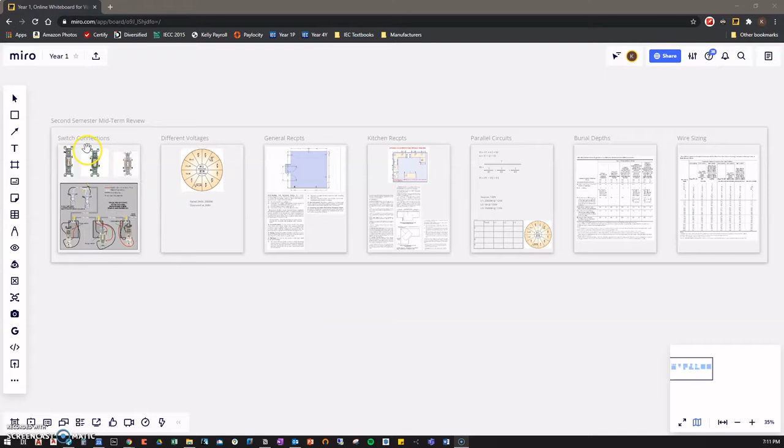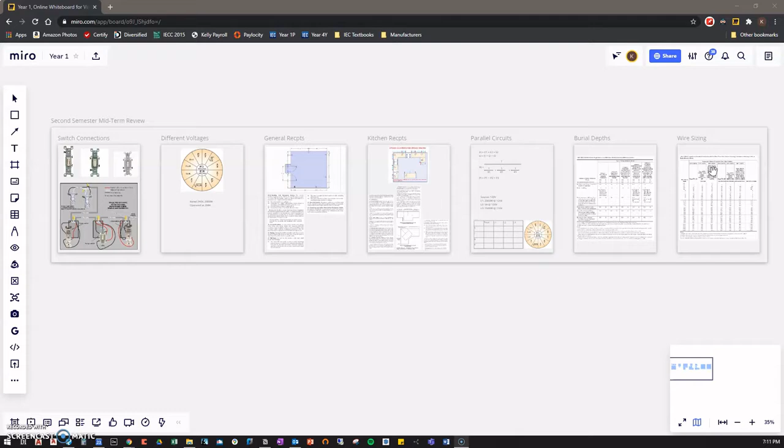most complicated topics. So we can see switch connections, different voltages. I'll explain what that means when we get there. General receptacle layout, kitchen receptacle layout, parallel circuit calculations, burial depths, and then wire sizing. This one's kind of a minor thing. There's not a ton of them on the test, but it's a very important topic nonetheless, and there are a few, so we should definitely cover it.

So if we sort of dive in here, our switch connections, right? And what I mean by that is you're going to see a couple problems where there's some switches, some diagrams, some pictures, and they say, where do your travelers connect? Which screw should go to your light? Which screw should be the power in? And I think the best way to look at that is let's just do some quick review on your switches,

right? So we see this guy here is a single pole switch. We know that because there are 2 screws. Not counting your ground screw, there are 2 screws, right? Single pole switch has 2 screws. Next up, we move to our 3-way switch here. Not counting our ground screw, we have 1, 2, 3 screws for wire connections. 3-way switch has 3 screws. We'll come back and talk about them here in a bit. We move over here to our 4-way switch. We know this because we have 1, 2, 3, 4 screws, not counting your ground screw, right?

So down here we see a diagram of a 3-way, 4-way, 3-way switch setup. First thing to note here to remind you guys of is for a 3-way, we have 2 screws that are going to be one color, generally gold. Then we have another screw that is a different color, generally black. That screw is known as your common screw, your point screw, your line screw, load screw, whatever the case is, that screw is different, right? This screw essentially goes to your light fixture, or it is power in from your source. The other 2 screws are for your traveler wires, right?

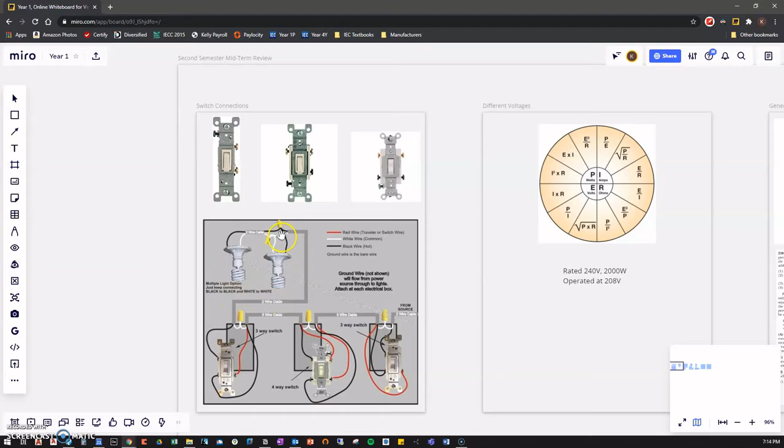Again, travelers here on the 4-way, all the 4-way switch has is traveler wires, but they go out into the other 3-way switch. We have travelers coming in here and here. Once again, that would be equivalent to here and here. Then our common screw is our power out to our light fixture. So I think when you're armed with those pieces of knowledge, that'll get you through what we need to know for the exam.

Next up, we're going to look at this different voltages scenario. And this is one I told you guys is not going to go away as long as you're in this class. Different voltages, what do we mean by that? Something is rated at one voltage, we are going to operate it at another voltage. What happens to the resulting other values? So in this case, this thing, whatever it is, is rated 240 volts. If we operate it at 240 volts, we will get 2,000 watts out. What happens if we only operate it at 208 volts, right?

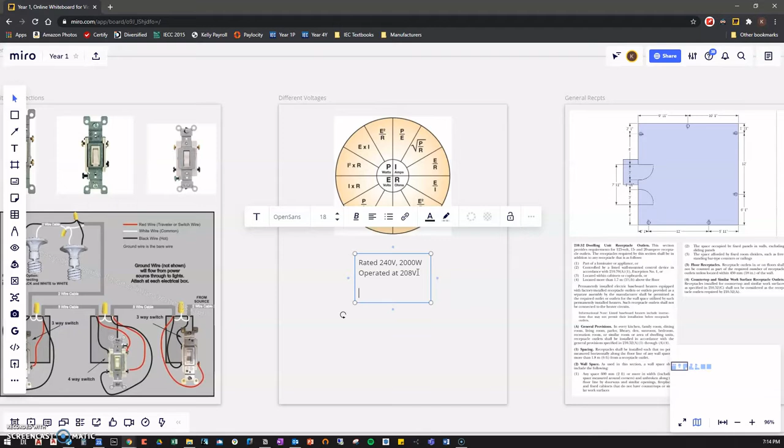Well, let's find out. So how do we solve this problem? The first thing we need to do is determine resistance based on the original values. That's the only thing we can do in this case. We know that at 240 volts, this thing would put out 2,000 watts. We have watts, we have volts. We need to find resistance.

Resistance is the only value that's not going to change no matter what voltage we apply. This goes back to first semester stuff, so hopefully this is boring by now, right? But we know voltage, 240, and we know wattage, 2,000. We can come to Ohm's law here. We're looking for resistance. We can say E squared divided by P will give us R.

So let's go ahead and look at that. So we can say E squared, which is going to be 240. So we'll just do 240 times 240 divided by P, which is 2,000. We get 28.8 ohms, right? So in this case, we would have 28.8 ohms, right?

So we're operating at 208. So the only value we can carry from this portion down to this portion is our 28.8 ohms, right? So we have 28.8 ohms. And now, lucky for us, we have two values. We have the 208 volt that we're going to operate it at. We have the 28.8 ohms that we just calculated, which means we can now find the other two values using Ohm's law, right? Let's find the wattage here to see how it compares in this case.

So if we're looking for wattage, we have volts, we have ohms. We can say E squared divided by R is going to give us P. So we'll say E squared, 208 in this case, squared, divided by R, 28.8. So we now know that this item, if operated at 208 volts, will only put out 1502.22 watts, right? So how does that shake out? Well, if we operate it at a higher voltage, we get a higher wattage. If we lower the voltage, the wattage lowers accordingly as well.

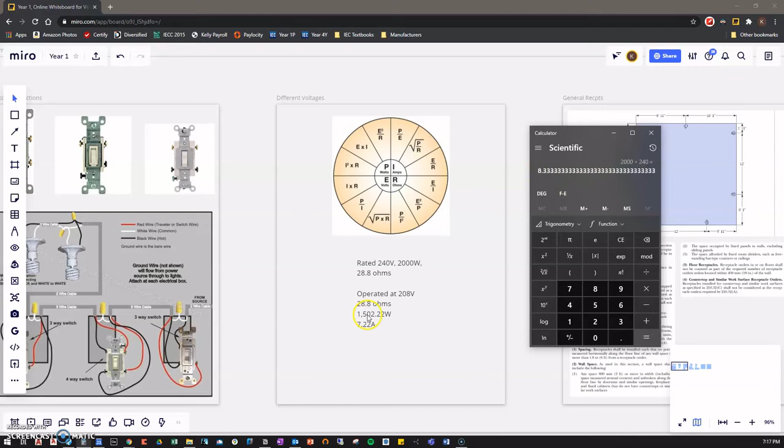Well, we can find that out by doing P divided by E, right? We're looking for amps, we can do P divided by E right here. So we're going to go back to the original. This is just out of curiosity, right? So if we did 2,000 watts divided by 240 volts, this thing would have put out 8.33 amps, right? So again, because we have a higher voltage, we get a higher amperage output. Because we have a lower voltage now, we're going to get a lower output.

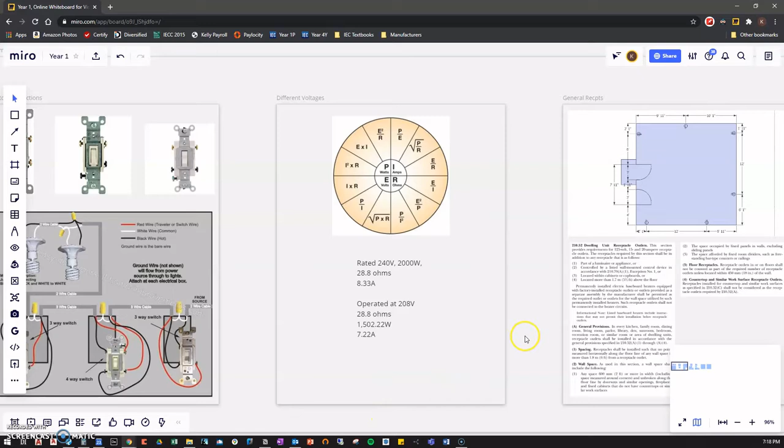The key to that one is fixed resistance, right? Find your fixed resistance right away. As soon as you see a problem like this, you should be thinking about finding fixed resistance. As soon as you find fixed resistance, couple that with the new operating voltage, you got two values. Now it's just an Ohm's law problem, right?

Okay, moving on, let's hit our general receptacles, right? And hopefully you guys can see this. I'll zoom in a little bit. But essentially, when I say general receptacles, I mean basically not the kitchen, not the bathroom, not the garage. We're talking about your normal rooms, right? Your living rooms, your bedrooms, that kind of thing. How do we lay those receptacles out?

Well, that's essentially a matter of 210.52(A), right? Everything under A is about where that comes from. And here's the gist of it. First of all, if you're not sure, look it up in 210.52(A). But here's the gist of that code. It's going to read no wall space can be more than 6 foot from a receptacle, right? No point measured horizontally along the floor line of any wall space is more than 6 feet from a receptacle.

Again, what does that mean? How far can we have between any two receptacles? The answer is 12 feet right here, right? And how does that shake out? Pick a point along the wall line arbitrarily, any point in here. If I go 6 feet in one direction or the other, I need to hit a receptacle.

So even if I come right in the middle, right? Exactly 6 feet. I go 6 feet this way, I got a receptacle. 6 feet that way, I got a receptacle. If I come down here a little bit, let's just pick this point, right? Well, we know if it's 12 feet here, if I'm all the way over here, this is going to be less than 6 feet. Doesn't matter that this one's 8 or 10 feet away. This one's less than 6 feet. We're good.

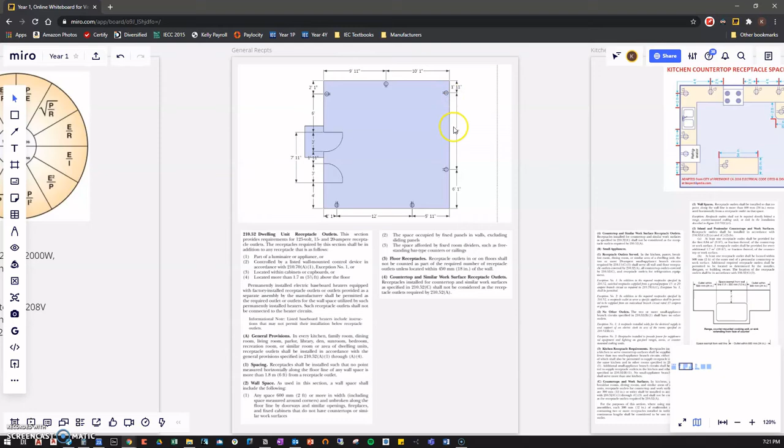Okay, so we'll end this portion of the video on this item here. Same logic, except now we're talking about kitchen countertop receptacle spacing, right? Same theory, same logic, but the measurements are going to change a little bit. Basically, we're exactly the same, except now instead of the code reading no wall space can be more than 6 foot from a receptacle, the code is going to read that no wall space can be more than 24 inches from a receptacle, which would then translate to our receptacles can be no more than 4 feet apart from one another, right?

So once again, in this case now, what breaks up wall space? Well, it's still doors, but we also add the kitchen sink breaks up your wall space. Your range cooktop breaks up your wall space. Your refrigerator here in this case breaks up your countertop wall space. So what do we do? Let's start at the sink here, right? We're going to go 2 feet. We're going to hit our first receptacle because no wall space can be more than 2 feet from a receptacle. So we go 2 feet from the edge of the kitchen sink, we have our first receptacle. Then we're going to measure another 4 feet around the corner to hit our second one, right?

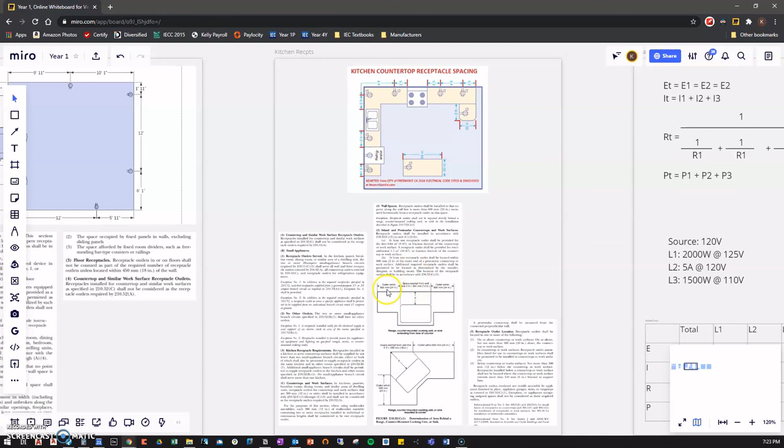Same story. What constitutes a wall space? In this case, it's anything that is 1 foot or larger. Whereas before, in the living room, in the bedroom, we were 2 feet. Now over here, it's 1 foot. So again, this is a 1 foot space, so we have to have a receptacle. Were this less than 1 foot, if it were 8 inches, we do not need that receptacle, right?

So we'll take a break here, break up the video. Part 2, we'll jump back in with our parallel circuit calculation.